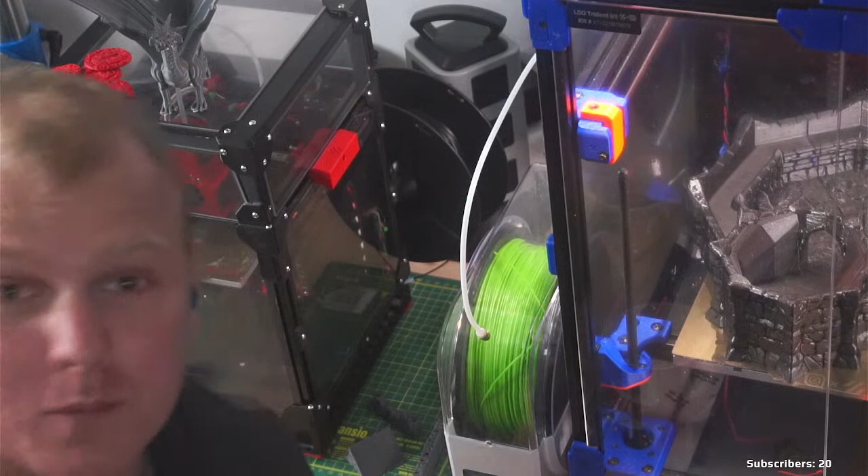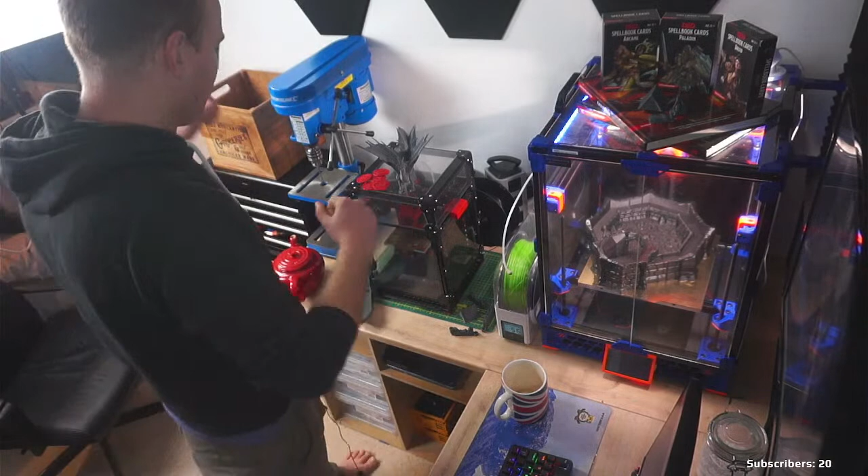So today's stream is going to be a little bit different from what we've been doing lately. Today is just going to be a mess around stream.

I can't swear because YouTube and stuff. Why can't you see my head? Much better. Way better when you can actually see my head and not just crop the top of it off.

Hey, Xscale, how you doing, bud?

Right, first things first, cup of tea. Because if you can't tell yet, I'm feeling very rather British today, even though I'm not British.

Right, what have you been up to today, Xscale? Not a very good teapot.

Having a beer on your end? Ooh. Vous avez une bière? Perfect, what kind of beer is it? That's the real question.

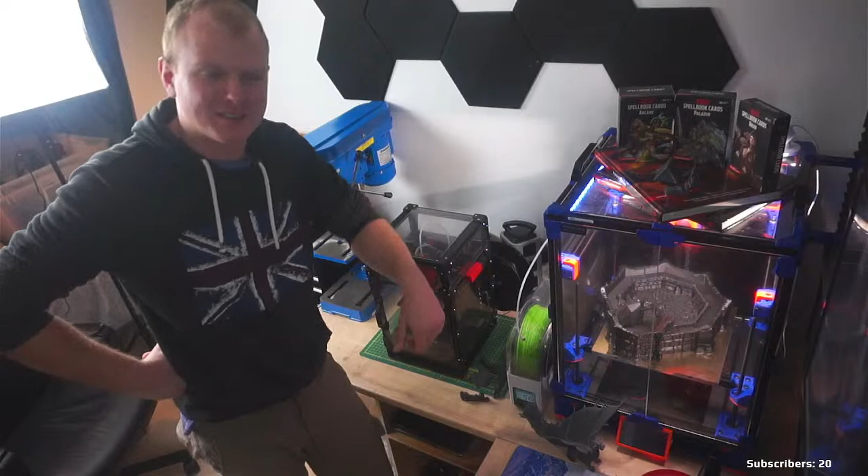I also have my V0.1, but it's been made to look like a V0.2 a little bit, and it has stopped working. There are a lot of things that I didn't do properly when I was doing this build. So it might be a case of the same thing I did with Milo, just take it apart and rebuild it. That could be a thing for the day, it just depends. First things first, I gotta clear my bench.

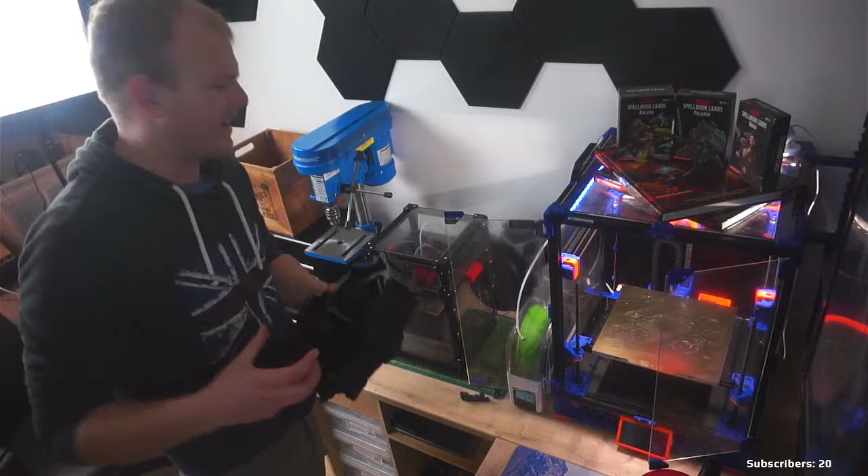Right, so my V0.1 was working. It actually produced the best prints I've had on any printer I've ever owned, but it's just stopped working.

It's been so intermittent, put it like that. Let's put some music on, get the music going. Yeah, so it works, then it doesn't work, then it works, then it doesn't work.

It's been a roller coaster ride with my little V0. Why isn't that going down? Feeding easily, there we go.

Dave, did you have this many problems with yours? Or is it just me? If Dave can actually hear me instead of just doing his shopping, he might just be. Perfect.

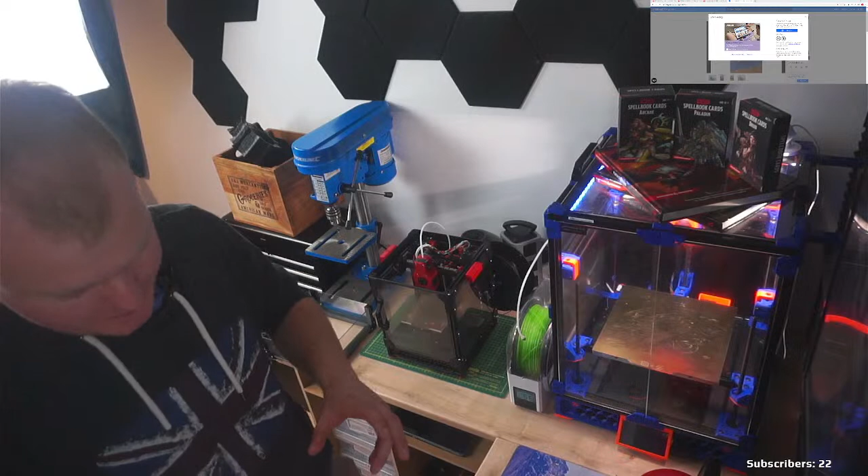As a software engineer, Thingiverse is so unacceptably broken for how popular it is. Agreed, I genuinely - don't worry, I completely understand where you're coming from, dude. The only thing is, it's still where everyone went originally, and Printables has only been out for maybe 2 years now, something like that, properly at least. So it's just not filled up as much, and I don't like things - I don't like Thingiverse whatsoever. It just, I don't get it, it's hard for me to navigate Thingiverse.

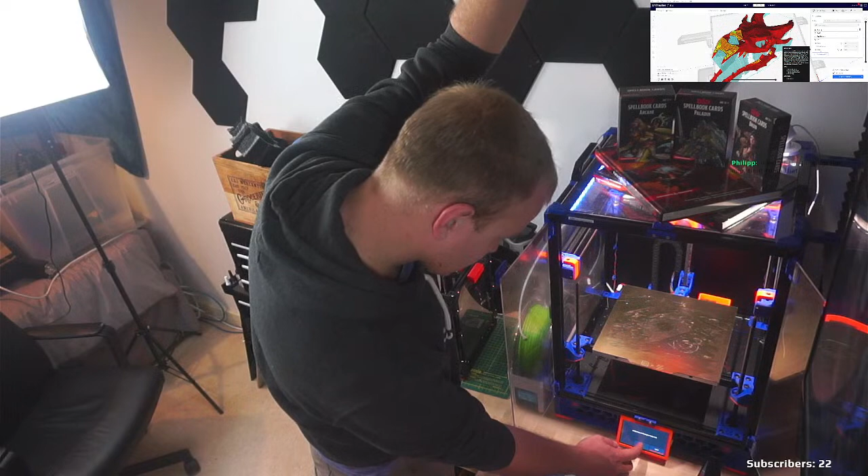You're gonna notice that my Trident is really loud. I don't know why, every time I start, I'm not really doing well today, I can't remember a thing. What's it called, stealth chop? Every time I use stealth chop on this machine, it squeals like a pig. So my machine is a lot louder than you might think, and on the other side of this wall here is my bedroom, and it's bolted to the wall. Every time this thing moves, I can hear it in there. Well, that's a price I need to pay. I've slept with a fan on my whole life, so I'm not too annoyed by the noise.

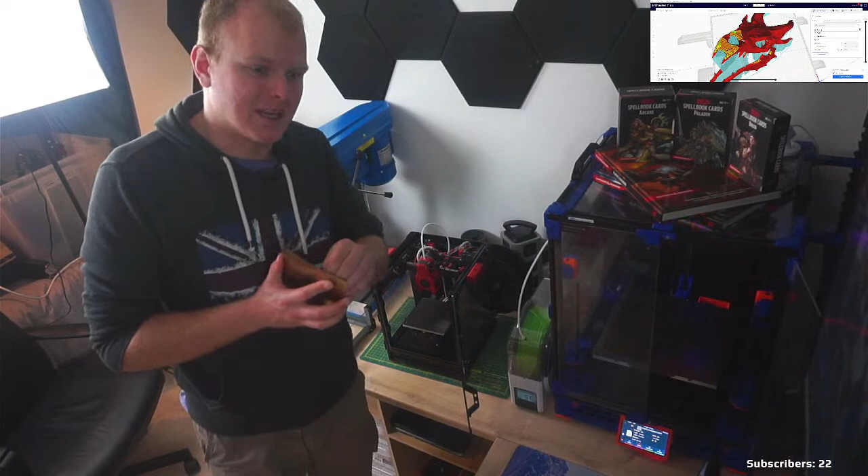Whew. Man, I'm sore. It's my first day off since I had a long time off. So I had like a week off, and I had a bunch of other stuff to do, and a few issues come up. That's why I didn't stream the other day, sorry to everyone who was trying to go to that stream. I had some issues that came up with a friend of mine and her partner, so I had to deal with those and help out where I could. Unfortunately, shit like that does happen.

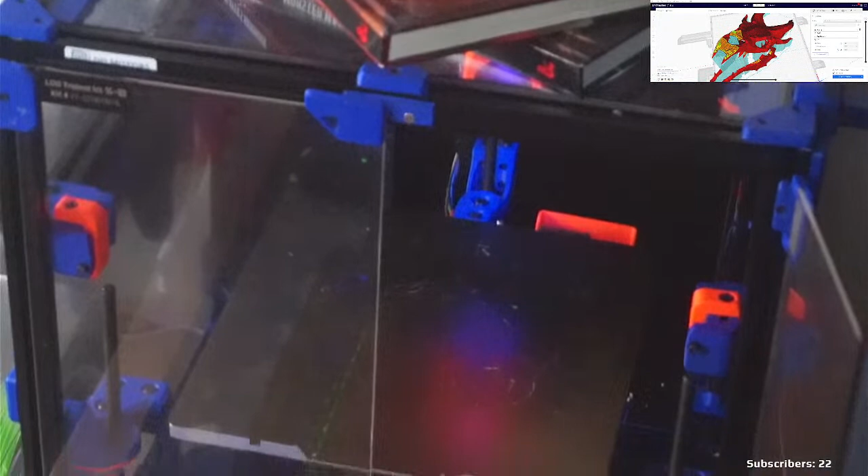Let's give you guys a close-up.

Development, application, and testing of ceramic paint additive that is meant to increase mechanical durability. Ooh, very nice.

So you're working at the moment, you're on the dev team, and you're studying for a master's thesis. You have way too much on your plate. I can barely deal with just having a job and having this as a hobby.

Is Simon in the chat today by any chance? I want to know if he got his parts delivered. I'll ask him on Discord.

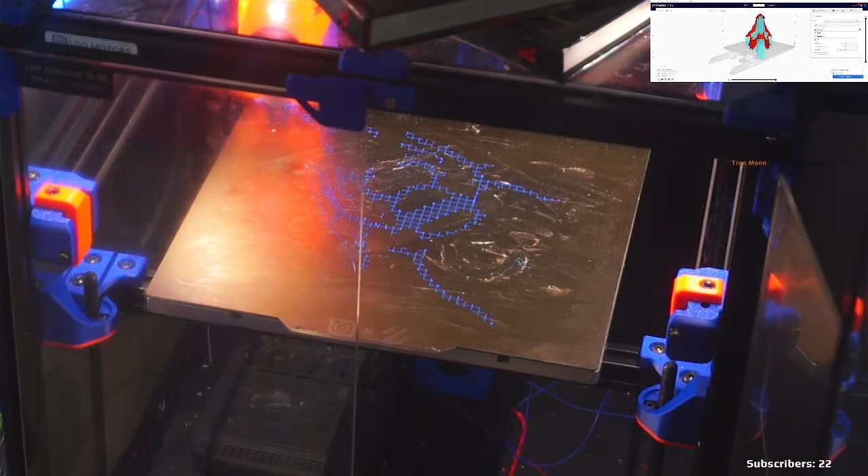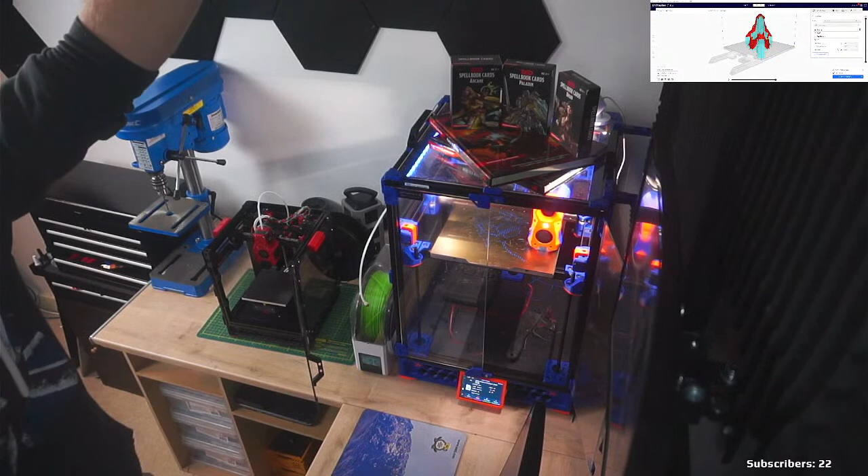Oh, thank you. It is a nice Stealthburner. So the orange ABS that I had in here was Millenium ABS, I think. I bought that roll by accident about 3 years ago. It's the best filament I've ever printed with. It's the cleanest I've ever printed with.

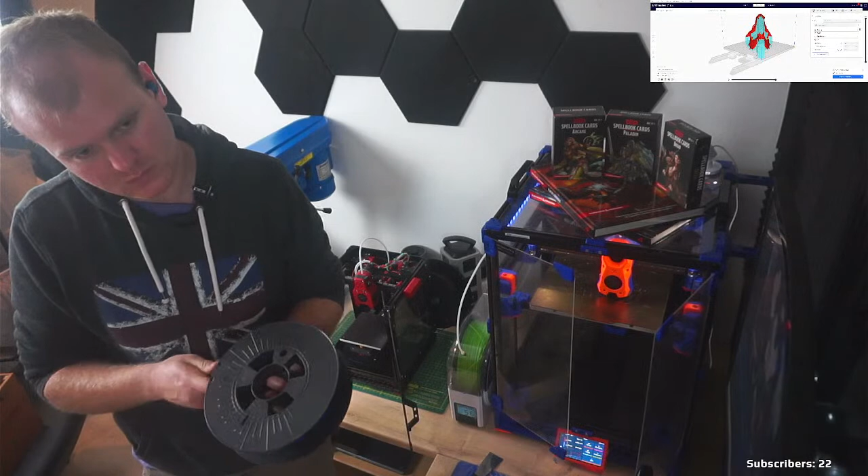Did you get any of the accessories with the mod vice? Like, did you get the mod vice, it uses Mitee-Bites doesn't it, to actually hold parts in, if I remember correctly at least.

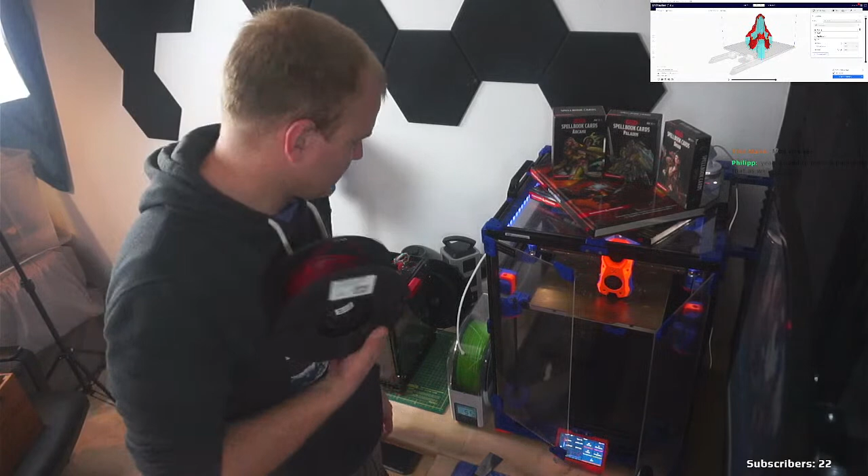I have a roll of nylon which I've never printed with before. This is one of the last batches that Rigid Ink ever made of their nylon, before they stopped making filament. It's been drying in a Sunlu dryer for 3 days now, not at the recommended temperature because these only go up to 55 degrees, but for a very long time, and there isn't any more water coming out of it.

I think that might be enough, that might be fine. So it's either red ABS or try with some nylon.

Don't really use nylon for anything, too bendy for most things. For a dragon skull though, might be cool to have.

Annoying that it doesn't match their step files though. How does the mod vice step? Is it not the same as what they have released to the public?

You know what, fuck it, we'll do a smaller dragon skull in nylon.

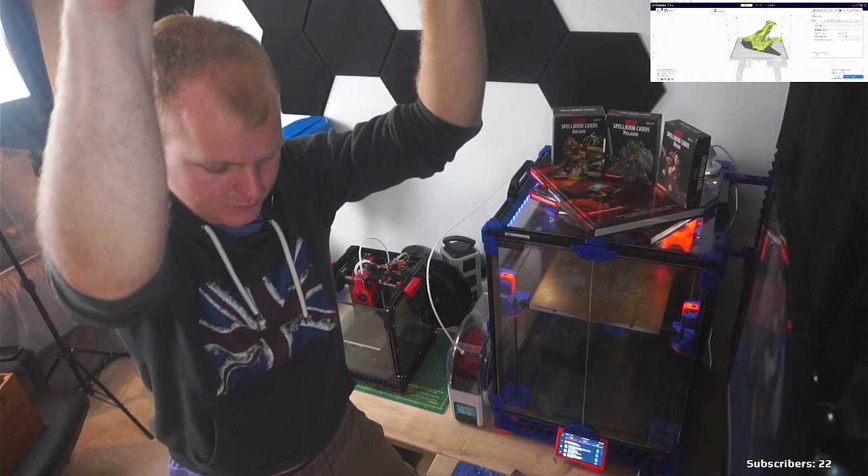I think it's simpler than you think. You're just letting it get into your own head.

How long have we been streaming for? Nearly an hour, and I haven't got a print started. Oh, this is how muddled my brain has been today.

What you could do is, if you create a fixture, so if you indent the part into your fixture, get a bit of HDPE or something, mill a pocket out of that fits your cylinder inside of it, right? And then use the work coordinate system that you used for the fixture itself as the work coordinate system for your part as well. And that way they should line up. At least that's my suggestion. My suggestion might be wrong, or might not be the most adequate way of doing it.

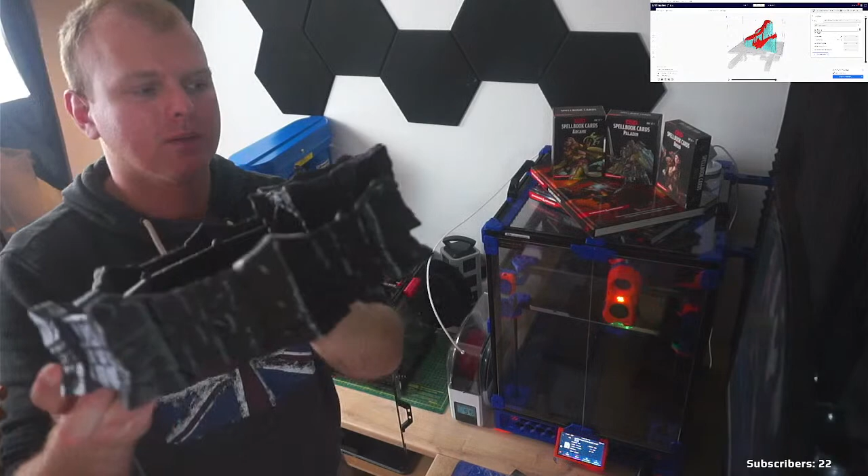The shafts are on the print the Voron did. So this is meant to be a dice tray slash dice tower. I actually think this is the first PLA print that ever succeeded on the Trident. I think it's actually pretty damn good. There's a bit of ghosting there, sorry, ringing. That's fine. The bottom side, however, not so great. I don't know why, but PLA just doesn't want to adhere to this bed very well.

And second round of tea. Because it's always a great idea to have tea at 10:30 at night just before you're about to go to bed.

Anyone heard from Ray recently? He seems to have disappeared off the face of the Discord ever since his build got done. Hope he's alright.

What does mine look like? Not sure, what is this? The one that you're... Is this a similar one? Focus, come on. Yeah. Is that the kind of touch probe that you have?

So if that's the case, then I think they're just called M3 styluses. I think it's an M3. Not too sure though.

Because I do remember seeing, I think Dave said this as well, the styluses that came with ours, you can actually buy from the seller. I'm pretty sure you can, at least.

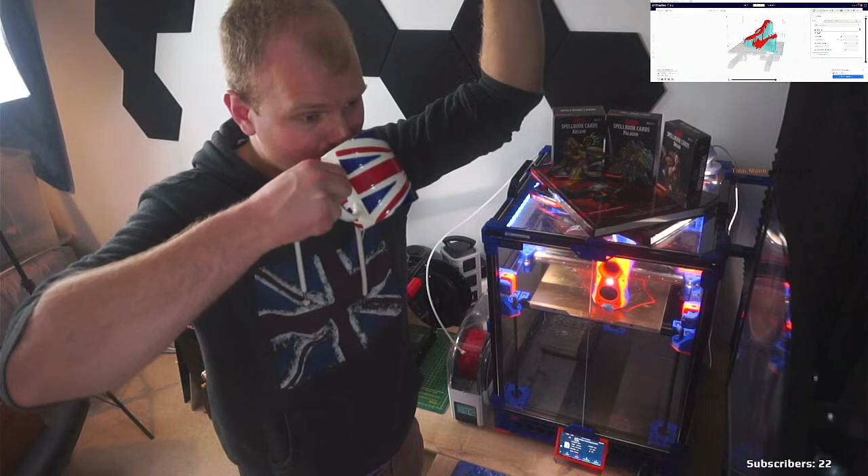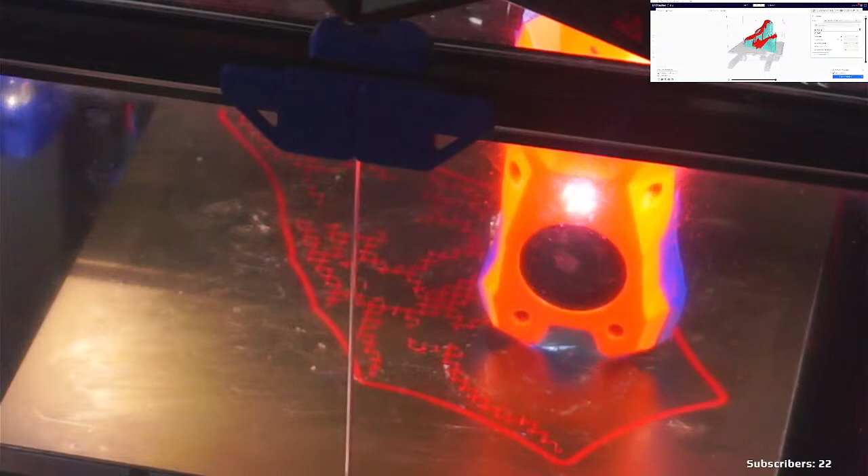Right, payday soon. I definitely need to get a printer webcam. But I also need to buy enclosure parts. Choices, too many choices.

M2.5, yeah, that sounds about right.

Or you have a lathe, don't you, Tin?

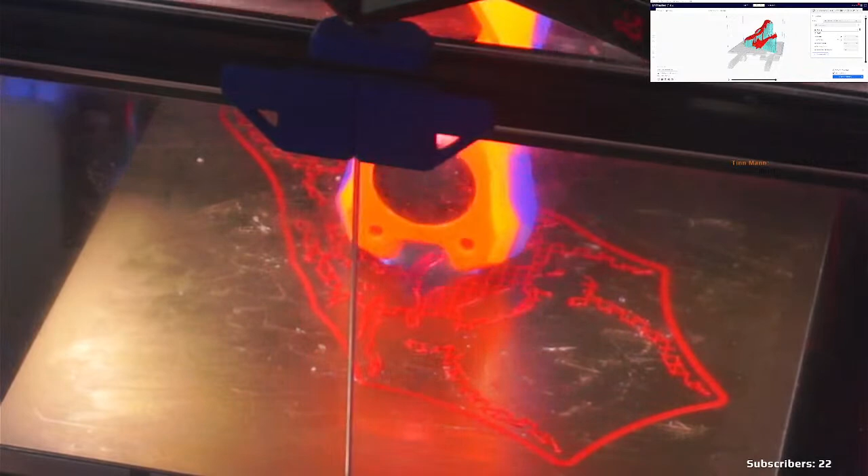Just milled a small pocket out of aluminium on my Milo. Wow, this thing is way more capable than I thought it would be. Oh, glad to hear it, dude.

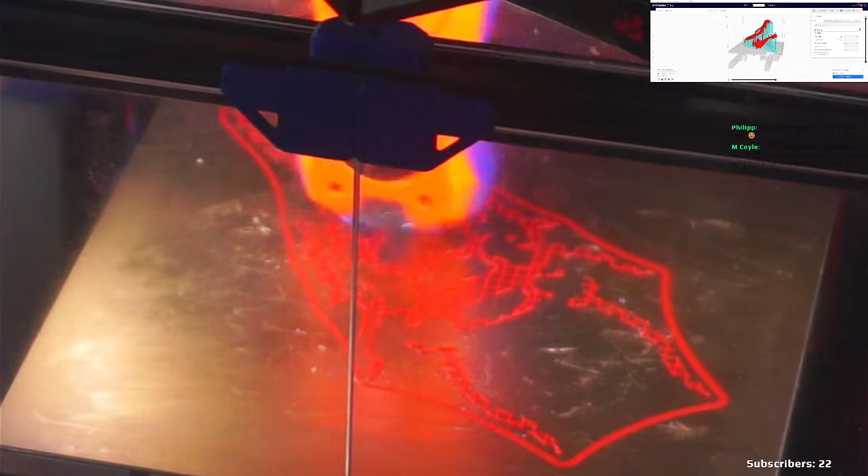What kind of machine are you running? Are you running a fully stock build? Or have you got FMJs and things like that? And also, have you got your machine serialed yet?

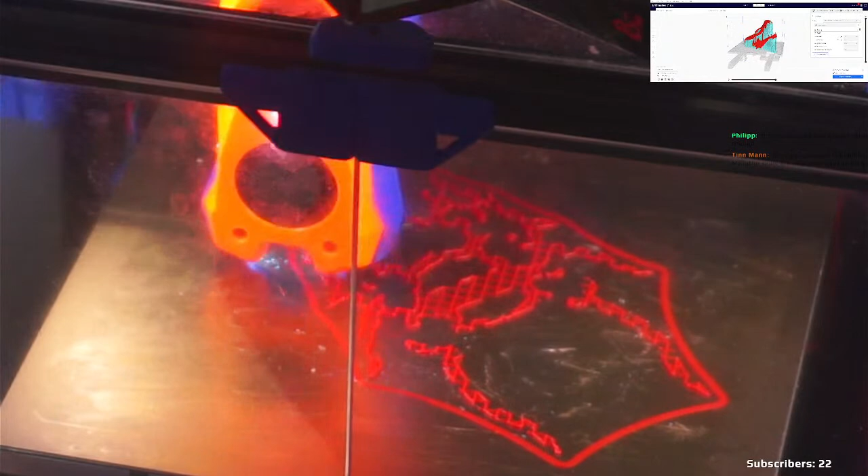Well, you know what I always say, Tin? If anything looks impossible, it's possible so long as you can engineer the shit out of it. And you can engineer the shit out of most things.

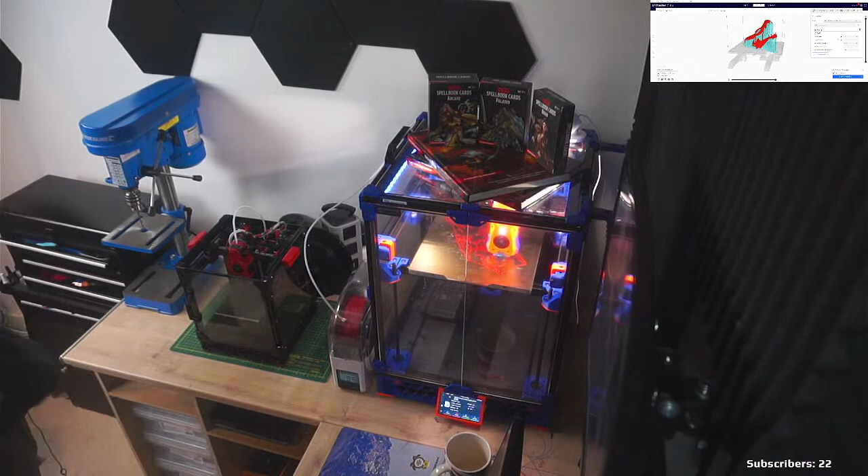Mostly stock, Duet 3 board, water-cooled spindle, recording a serial video now. SN hashtag. No idea what that is.

Oh, serial number. Yeah, I think that's going to be the case. Who was it that came up? Never said anything on the Discord before, still hasn't said anything, but just popped up with a full-on build and got serial number 11. Well, either 10 or 11. It looked like a wicked build though, all two-tone. Ah, it was cool.

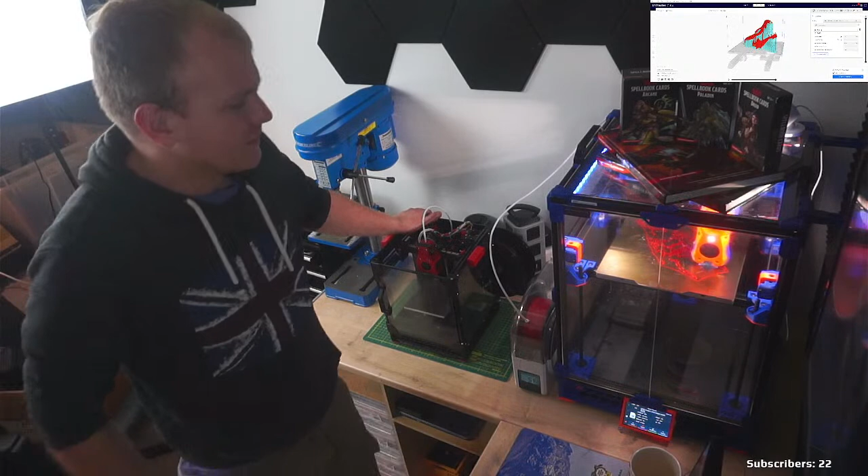And I'm glad it's happening, it means the project's rolling forward. Have you noticed that serials have been coming in slightly faster each time now? The first 5 took a long time to get there, the next 5 less time, and now once we're at like 10 or 11, they're just rolling in. Good to see, good to see.

Right. Cold pizza slice, that was it. I'm going to ask you guys a question.

Would you like to see me do a V0.2 upgrade? So I take this apart, yet another machine apart, and rebuild it from the ground up.

It's nice to, like, from my end, it's really nice to see it happening.

Oh, you weren't here for the beginning, were you Tinn? So this is my V0.1. It has a few weird upgrades. So it has the V02 skirt and my own version of the top hat. Where is it? So this is a one-piece print.

This isn't first layer, this is all support material. We haven't even got to the print yet.

Yeah, do you have the wobble wings installed on your printer?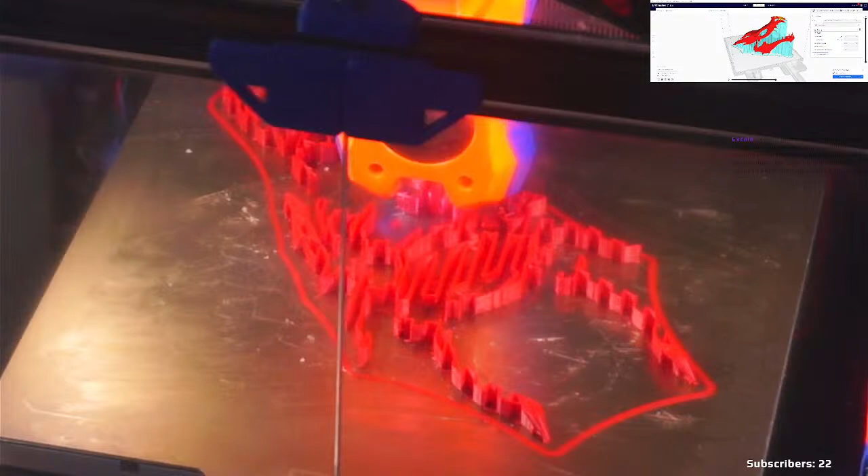Fair enough, yeah, again I just don't understand markdown sheets. If you want, you can try run me down now, run it all down for me now, see if it makes sense. To me it just seems easy enough to edit a document, like a Google Doc or something.

But again, I have no idea about things like this. I am more of a mechanical dude and not a software guy. Code scares me, as I've said on multiple occasions.

Tell you what, actually, do my Wera screwdrivers have a good tip? Might just have the right tip for these screws. Oh, look at that, way better. Oh, like butter. Don't you love it when you have nice tools that actually work?

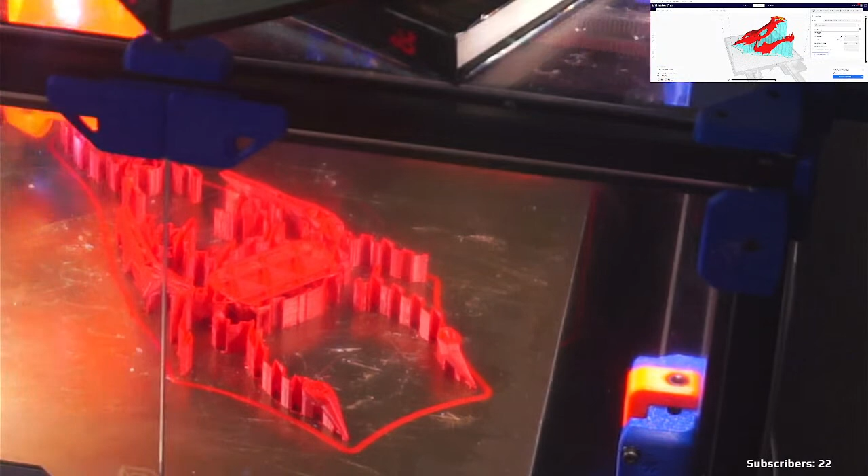What hot end is in your Stealthburner? On the Trident, it's a Rapido high flow. Hence the reason why I struggle a lot with printing PLA, because the melt zone's too long and it heat creeps like crazy in an enclosed chamber.

Really need to find a way to automate that.

I think the real takeaway from it is that open source has no one real definition. It depends a lot on the industry you're talking about, and a lot on some personal definition. Obviously, if you say your personal definition of open source is a carrot, well then you're talking a bit of bullshit there. But you have to do it within reason.

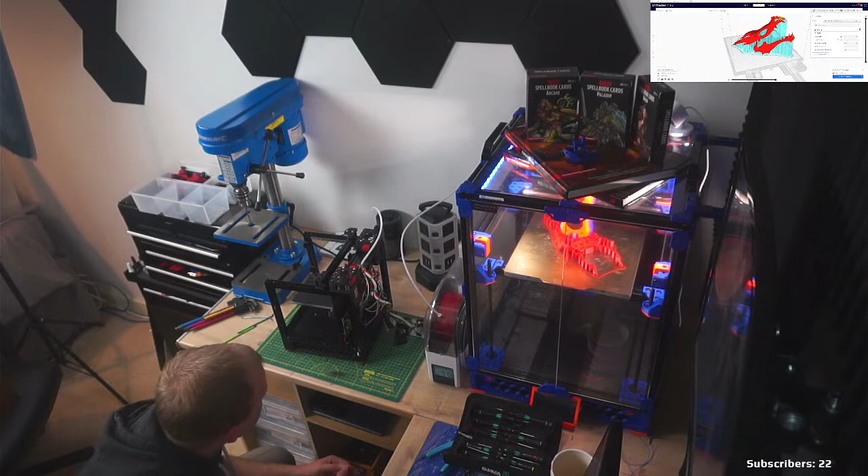You have to be part of some kind of team, like you were on, that vets everything that gets said and adds it to an official roster somewhere, or official project. And then other people can use your work and you can use their work. But at the end of the day, someone needs to decide what's happening with what, how much, how long. It can't just be a community that does it all.

Because if there's one thing I know from working in this community - it's not a bad thing at all, don't get me wrong - feature creep is a big thing. It's a big issue. The amount of times I've had to go to members of the team and remind them that feature creep is a thing is astounding. And I'm not saying I don't fall for it either. I very much do. I'm the main culprit of it most of the time.

But if you just let a million people have their voice - not just heard, like everyone deserves to have their voice heard - but if you let everyone decide what they're going to put in, the project doesn't get done. Yeah, that's what I mean by it.

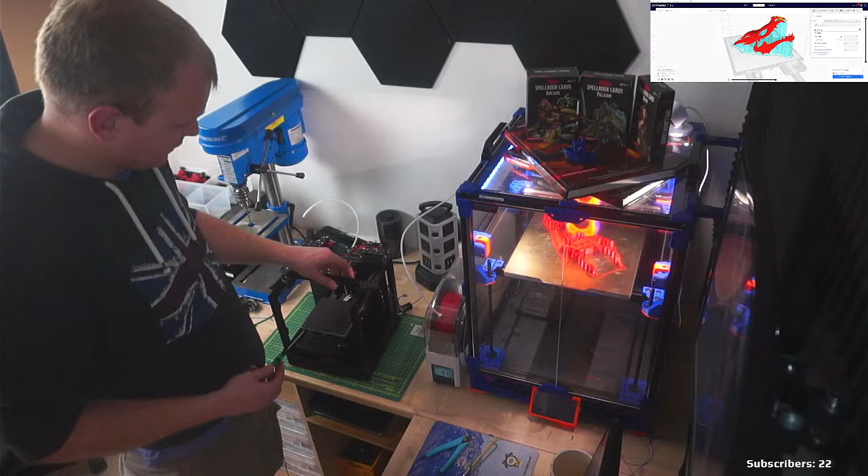Roadmaps - things falling outside the roadmap are often ignored. Again, on a hobby level, we don't have roadmaps. We have things we would like to get done on the team, but we also have our own priorities in our own life.

Dave's got a house to build. I've got a fairly low to mid-range job, which means I can't always afford to build this, buy that, upgrade this. And that means the project slows down sometimes. And I think that's a very good thing, in a way. I think it's a very endearing thing.

Should I put it that way instead? I think one of the reasons, at least, that Voron still has more traction than Rat Rig, even though I think from what I've seen the Rat Rigs are technically better machines, is that it gets more support because it's more relatable. People like to see the guy in his garage inventing things that change the world rather than a company doing it. There's charm in it. There is. There just is charm.

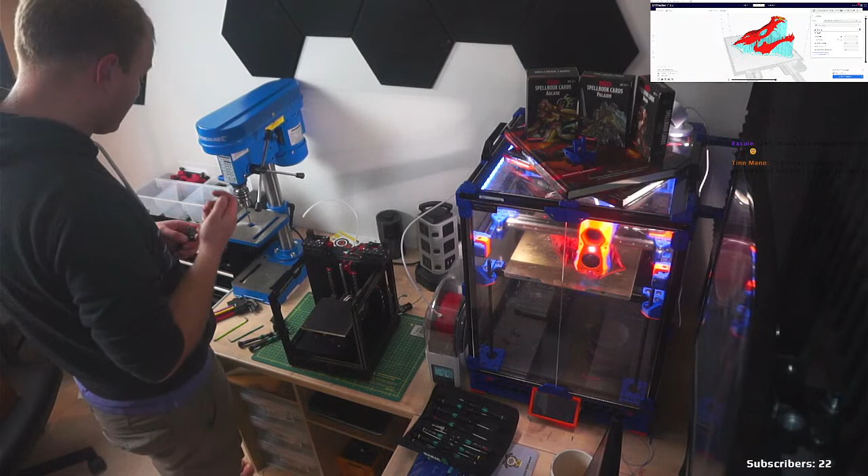Are you off Xscale? I hope I didn't annoy you at all. I wasn't trying to, I wasn't trying to aggravate you.

I will do, man, will do. Fair enough, dude. I might be closing up here soon as well. I think I'll take these last few linear rails off, and then I'm gonna head to bed.

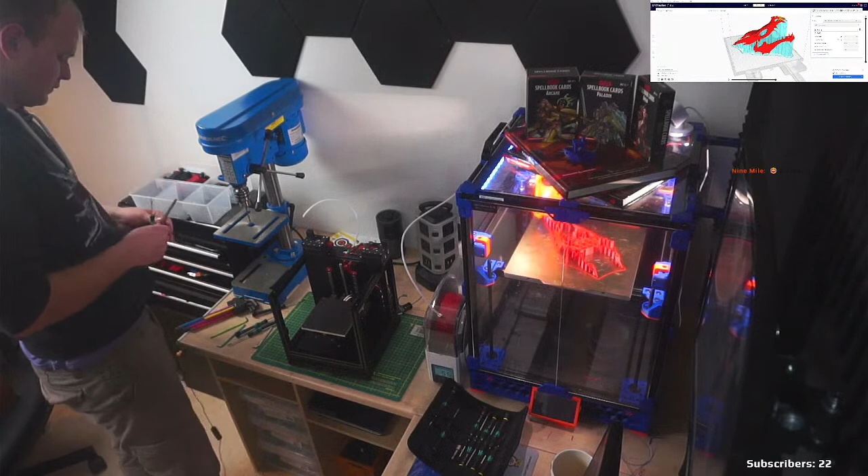So my first ever motorcycle in the UK was a Duke 125, KTM Duke 125. And the day I got it, I did 200 miles on it, just up and down the Lake District. I was so enthused by it that I decided to go for a camping trip to Scotland, and it was the day before the lockdowns were meant to come into effect. So I set off, and I thought, okay, they'll get me in Scotland and turn me around, but at least I might be able to get a day there or something.

I was only allowed to go on B roads at the time, back roads, no motorways or highways as Americans would call them. So going through these back alley parts of Scotland, I got turned around by the police. They were really nice, really courteous. They said, yeah, we get what you're doing, but you can't do it. Turned me around, and that was after like 9 hours of riding.

And I started riding back, and somewhere in the Scottish Highlands I just canned it. Luckily, the side bags I had on at the time stopped most of the frame from getting damaged, so it was still rideable and I could ride it back. There were only a few scratches on the tank, that was it. But I came off at a good 50 miles an hour, and it was a miracle that I didn't get hurt.

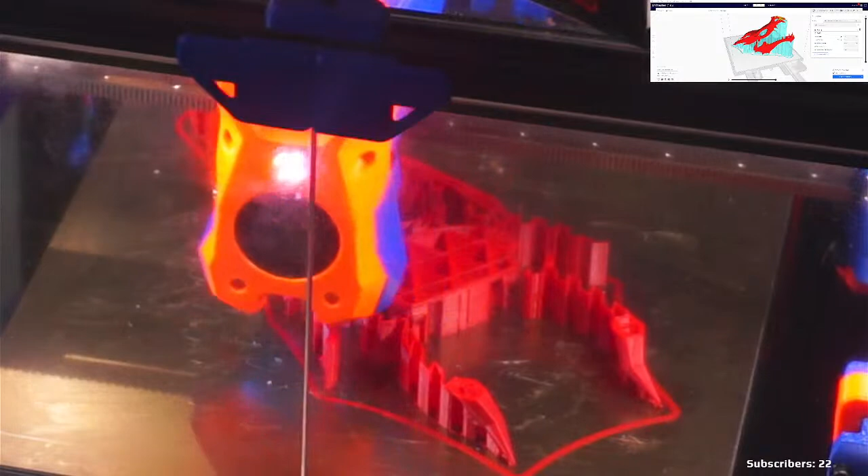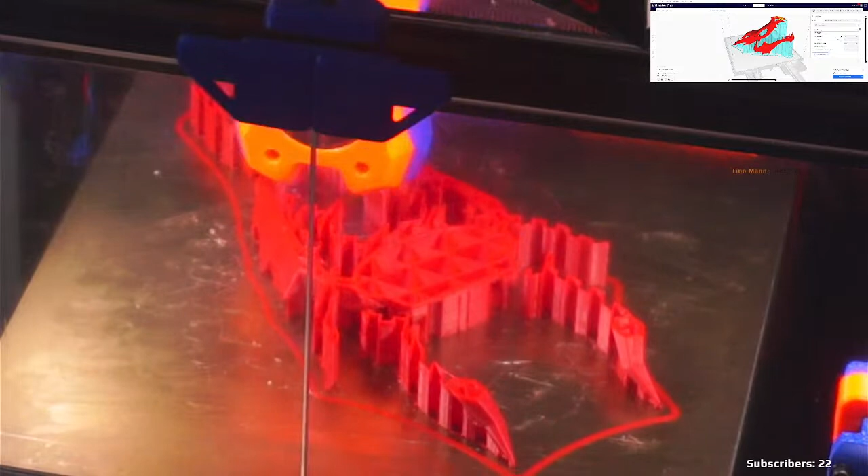It's all right, I learned since. I did crash that bike again, but that was for a completely different reason, that wasn't my fault. I walked away, had a few bruises, and that was it. It was all good, I survived. At the end of the day, that's all you need, isn't it? You survive so you can keep doing other awesome stuff.

Like making little Milos, things like that.

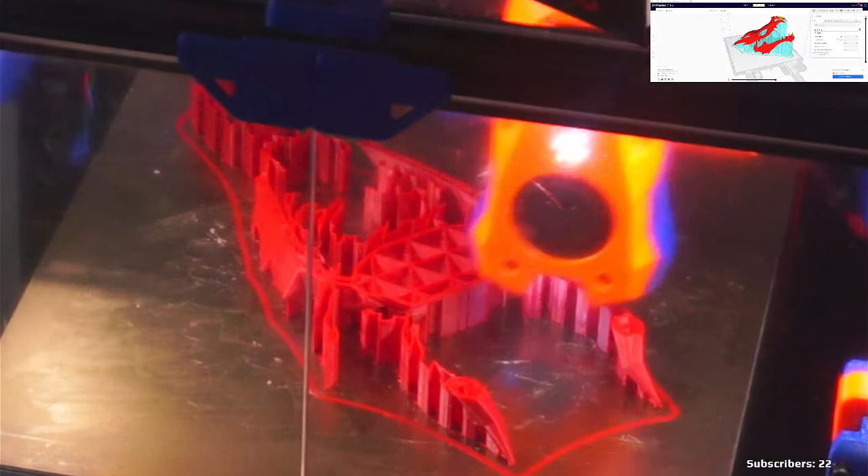Yeah, you're right, if you do walk away from a bike, you've managed well.

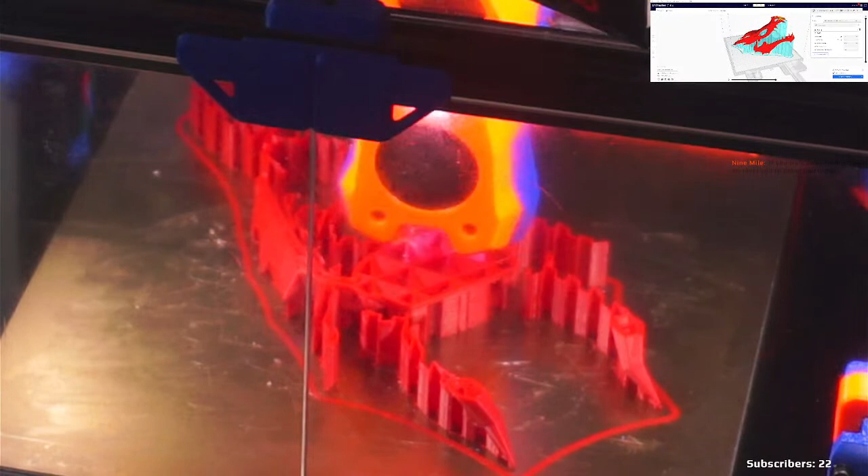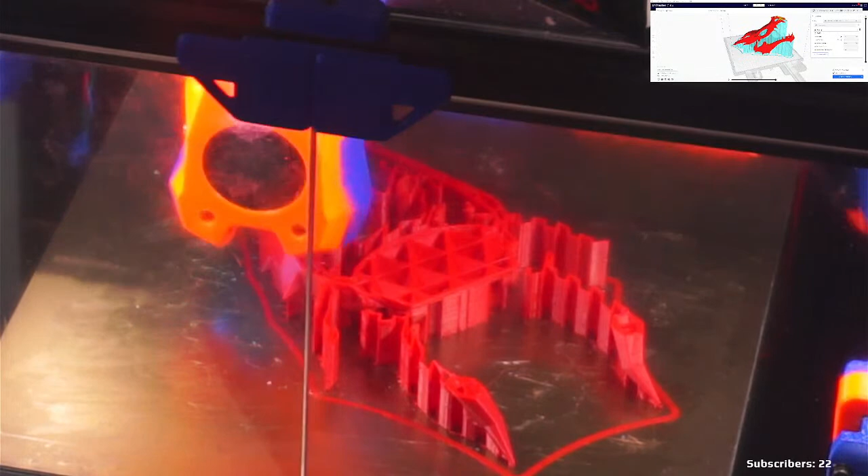What profile did I start with on the Trident? Something from Ellis? No, I started with the baked-in version for the Voron 2 in Cura. Changed a bunch of accelerations to match my input shaping results, so I think I run 8K on the X axis in both directions. And that's it. Oh, and I turned combing off, because before I turned combing off I was having some really weird extrusion issues. I don't know why combing affected that. I turned combing off and turned coasting on.